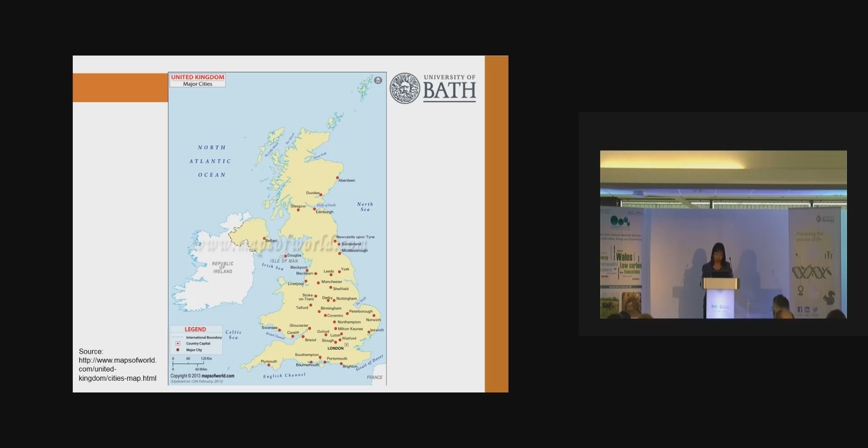Looking at what happened in the past, particularly after the Great Flood of 1953, just 60 years on we had the 2013-2014 winter storms. So we have to ask ourselves, are our coasts safe? What else should we do?

This year I had a very good undergraduate dissertation student, so we discussed why not do some comparison, particularly looking at the 1953 Great Flood and also 2013-2014, so we can assess the performance of the British coastline, and also explore its future challenges.

Our study has revealed that British coasts are currently in a much safer state compared with six decades ago. So what's the evidence? I can show you some numbers and figures.

We looked at the number of deaths from both the Great Flood of 1953 and the December 2013 storm. We also looked at residential properties flooded, the area of agricultural land inundated, and the people evacuated.

If you look at the numbers, you can see we really have increased performance from our defenses. Certainly all these initiatives, efforts, and investment driven by the government are resulting in us being in a much better position.

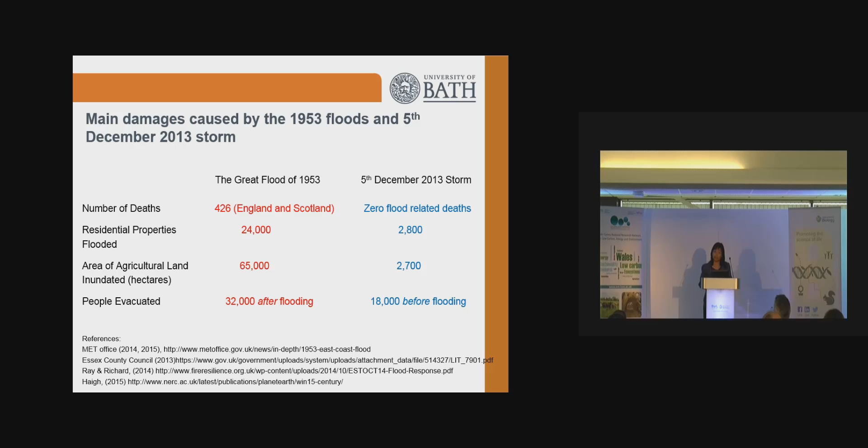But certainly, have we done enough? Ruth has shown some of the damage from the recent flooding event in 2013, the winter storm, and we lost part of the sea defense in Dawlish, and certainly the rail track was suspended, stopping transport for almost two months. So you can see the loss, damage, and disruption to the Southwest economy is huge.

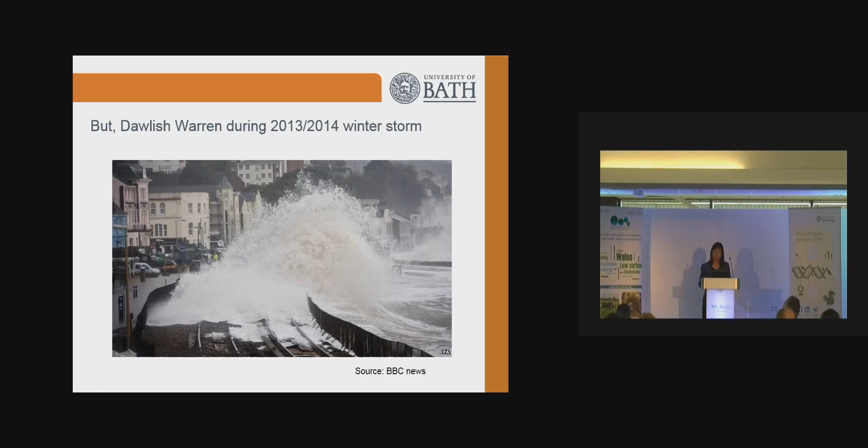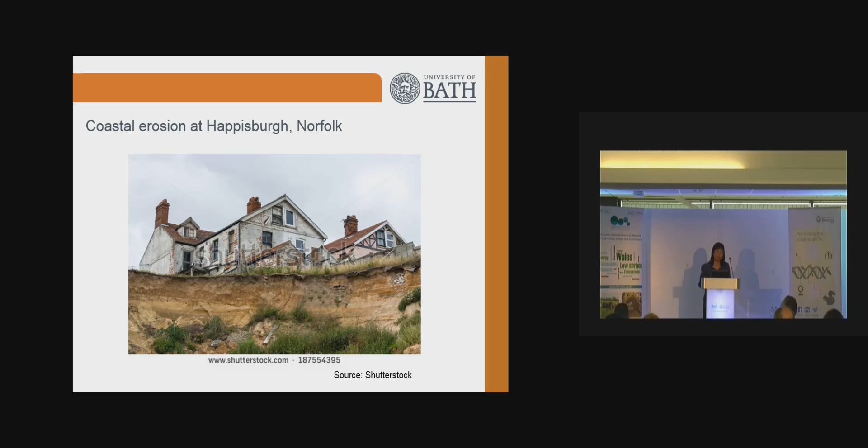Apart from Dawlish, on the other side of the UK coast, particularly the east coast, there's coastal erosion, particularly cliff erosion, another type of damaging coastal erosion. Another problem is if you look at future climate change, we are going to be in the worst-case scenario, with more extreme weather conditions coming.

So that's about the challenges to coastal communities. On the other hand, the opportunities we have come from easy access to the sea. We've been leading offshore wind in the last couple of years, but the whole offshore renewable energy development, including wave energy and tidal energy, represents huge potential and a great market, particularly for the UK to maintain its leadership.

We had talented people working in the oil and gas industry in the past 20-30 years, particularly for North Sea oil and gas exploration. We've got those talented people, we've got the technology, we've got the infrastructure. Now we just need the mission and the passion, the investment, and the support from the government to drive through and accelerate marine renewable energy development.

In the Southwest, we are in a slightly good position. I know Welsh colleagues have done a great job pushing tidal energy and wave energy development, and certainly in the Southwest UK we have expertise, facilities, and capabilities. We've got world-class research universities - Plymouth University, Bristol, Bath, Southampton, and University of Exeter. Together as units, we created the PRIMaRE partnership.

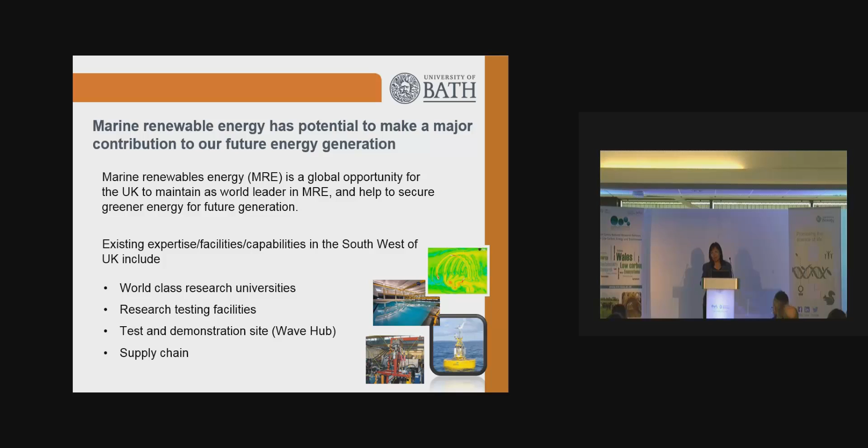So we've got research testing facilities. We've got the Plymouth laboratory, a fantastic facility there. We've got Wave Hub, which is similar to the EMEC. We've got this demonstration zone which can help commissioning and its commercial development as well. And we've got the industry supply chain available to help us work together.

So in response to the need and the recent developments in marine energy, that offers a great opportunity for us to work together. That's why we got a few universities, research units and industry to set up and try to foster research exchange and collaborations with wider communities, with Welsh people, with Scotland, and with the international community as well. So our objectives are working together and driving research exchange.

Each year we host an annual PRIMaRE conference, and this is a free event. It's about 1.5 days, followed by an industry-driven workshop. This year the PRIMaRE workshop and conference will be held in Bath, at the University of Bath, and I'll be chairing the conference. This is a free event happening in early July.

So if you want to attend and join our conference, the registration for coming to the conference will probably be open very soon. Send me an email if you want to come. So that's about PRIMaRE, and this highlights the expertise, facilities and capabilities we can offer.

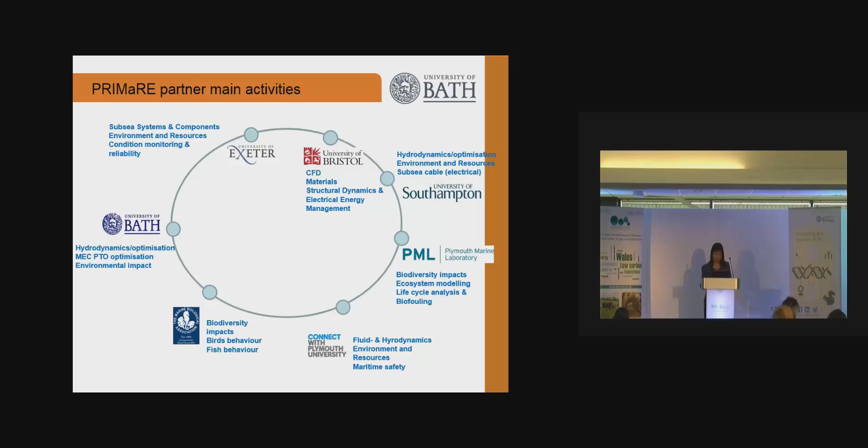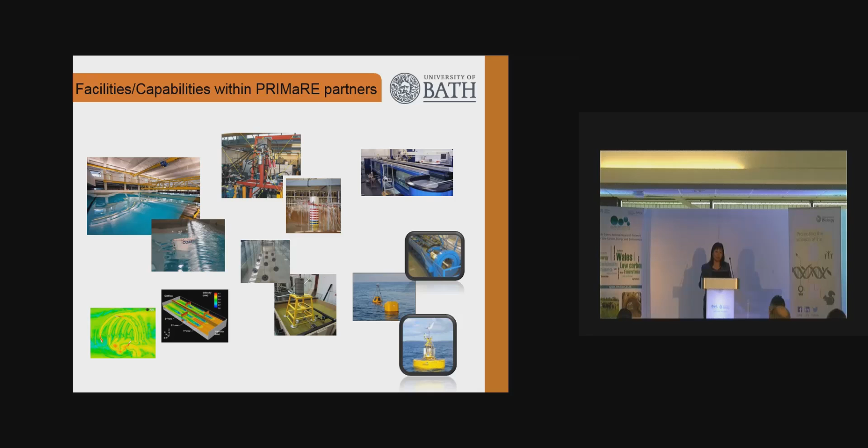So here, just highlighting the research currently being worked on: numerical modeling work for wave energy and tidal energy, and also offshore wind, and the laboratory in Plymouth, and also some field tests at Wave Hub and near Exeter, and for some mooring and facility work as well. So that's about the Southwest Marine Renewable partnership.

In the University of Bath, we recognize the need for promoting wave energy, particularly for the environment and the water, and for the energy shortage, particularly the challenges due to climate change. So we set up this Water Research unit.

That was 2 years ago. We expanded very quickly - at the beginning only myself, but now we have 20 people, with academics, PhD students and postdocs working together. We certainly welcome opportunities to work with wider communities like today's network, and we're going to expand that network with industry as well.

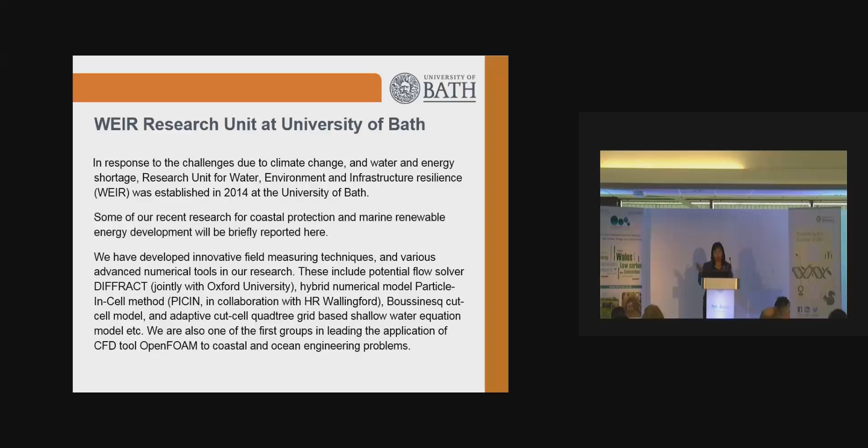So I'm going to highlight a couple of the research projects we've recently been doing in Bath. We have research about water quality, and also flood prediction, for urban flooding, for coastal flooding, and also infrastructure resilience, with different academics covering different areas. Today our focus is on coastal protection and marine energy development.

This research is led by my colleague Dr. Chris Blenkinsopp. He is leading an international effort to do field monitoring about wave and beach shoreline changes, which could help us understand more about coastal processes and how we can promote longer-term sustainable beach and coastal protection.

This research is led by me, and we try to understand - particularly since doing field work and laboratory experiments is very, very expensive - we need to develop excellent, accurate and efficient numerical models to be able to do things very quickly, so within a few minutes or a few hours we can at least get a very quick solution.

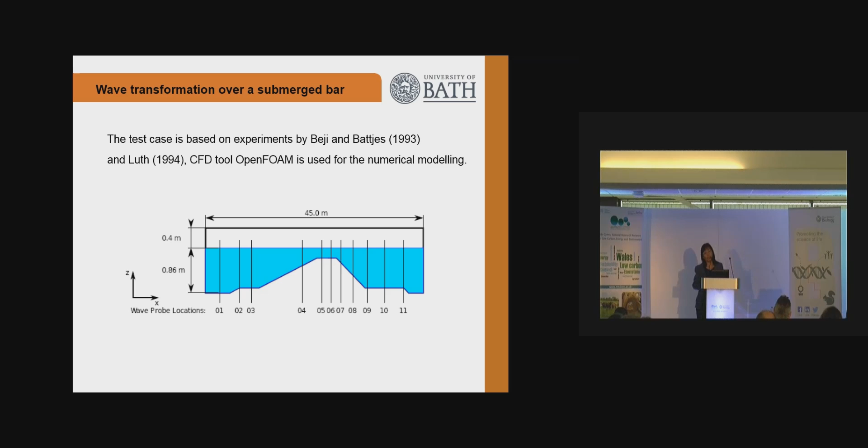So we look at the wave propagation and transformation over a submerged breakwater, to check how that submerged breakwater can help mitigate the wave impact.

What we found, if you see the wave from left to right, we start with a regular, very simple waveform, but once it propagates over the top of the bar and also the lee side, you can see the waveform has been transformed considerably, from very linear to very strongly nonlinear, and also the wave height has increased more than double.

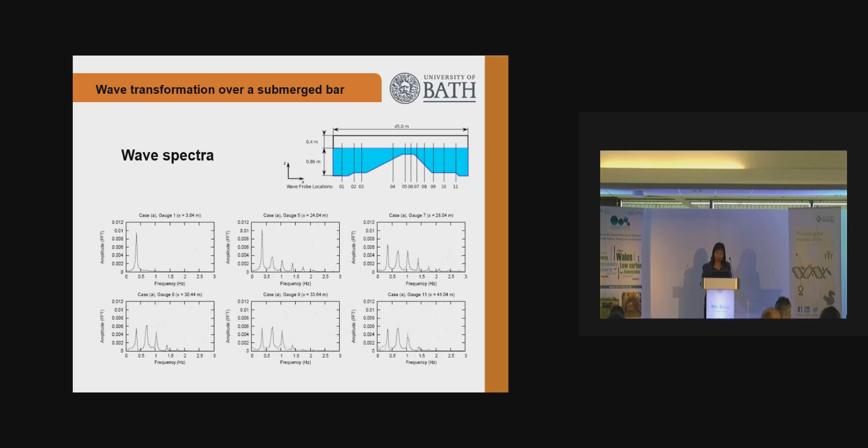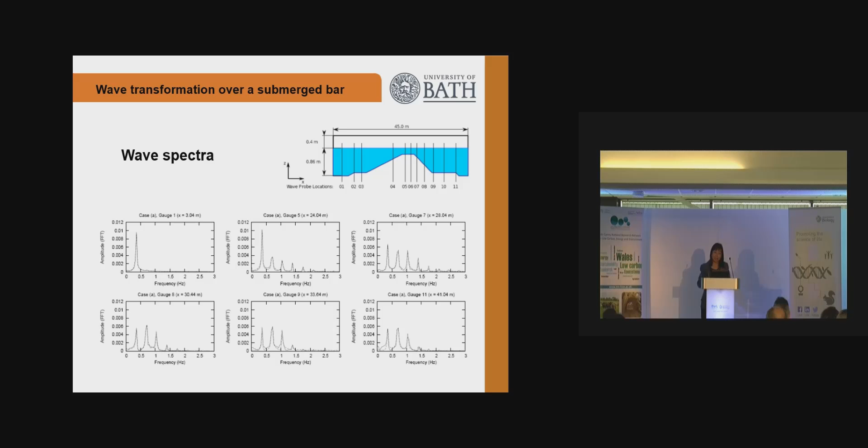Another thing is if we look at the spectra, particularly the energy spectra, so a single regular wave with single frequency, but once it's propagated over the breakwater, you can see how many more harmonics have been generated. We have witnessed up to 8 order harmonics, meaning wave energy has really changed, so we have to look at the impact on the structure as well.

Another test case we've been working on is in collaboration with Plymouth University and other universities in the UK. We look at breaking wave impact on a vertical wall. This is a very complicated problem with bubbles, air, and a very complicated free surface. So we've done both laboratory study and numerical study to try to understand what will be the high peak pressure and loading onto the vertical seawall.

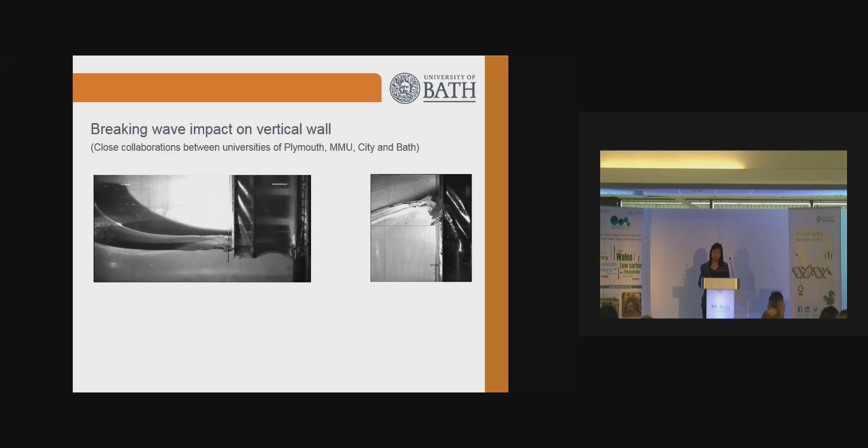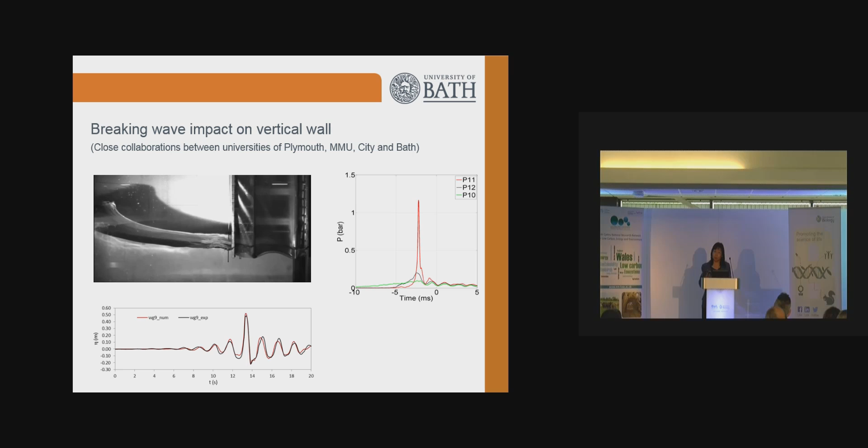So that could help for the future design of infrastructure. You can see that once we get the breaking wave impact on the seawall, we get a really short but very massive peak in the pressure. So for part of the structure, you have to design it to resist this violent, impulsive pressure. We've also done numerical modeling work that confirmed we can reproduce the same quality of result just using our computer in the office.

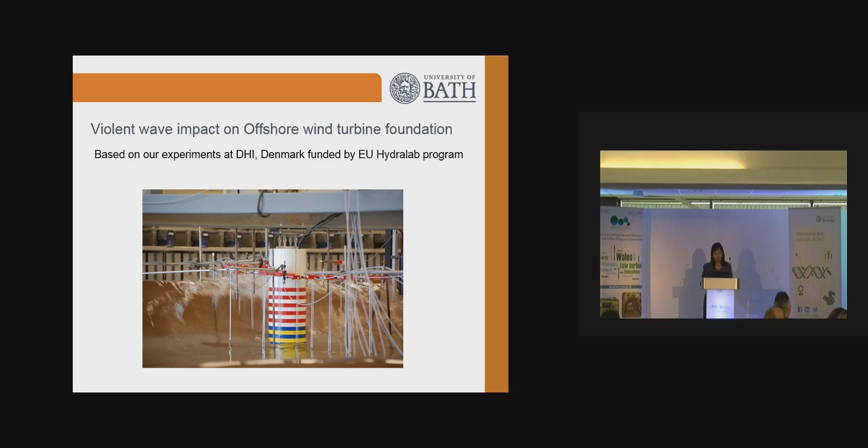Another work we've been doing was a large scale experiment performed in Denmark, funded by European funding. I was the project leader, leading a couple of universities from different countries. What I found from the breaking wave impact on this offshore wind turbine foundation is that the loading we have been designing for in industry is not enough, because the design code normally uses linear wave theory.

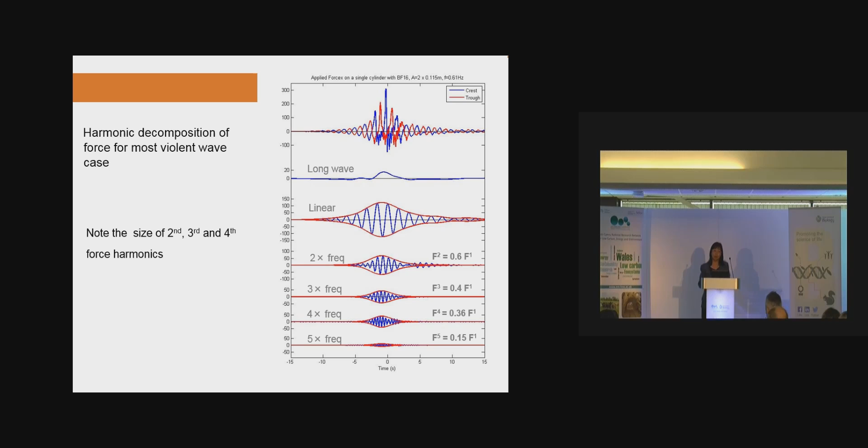If you look at the second order, that's almost 60% of the linear wave loading, and the third order means your linear wave loading is only about 40%. I hope this message can be delivered to industry people, how we can change the design code to take account of this higher order, particularly resonance for the structure and fatigue as well.

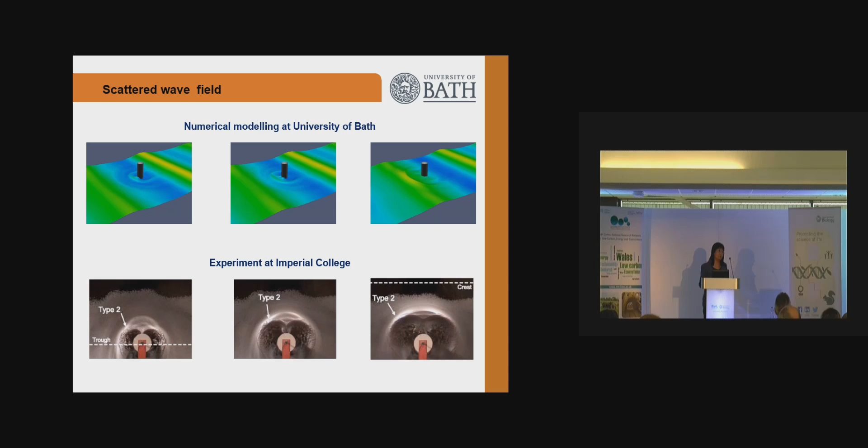We also compared with other research from Imperial College, and the numerical model and experiment all confirmed the results are the same, consistent in their answer.

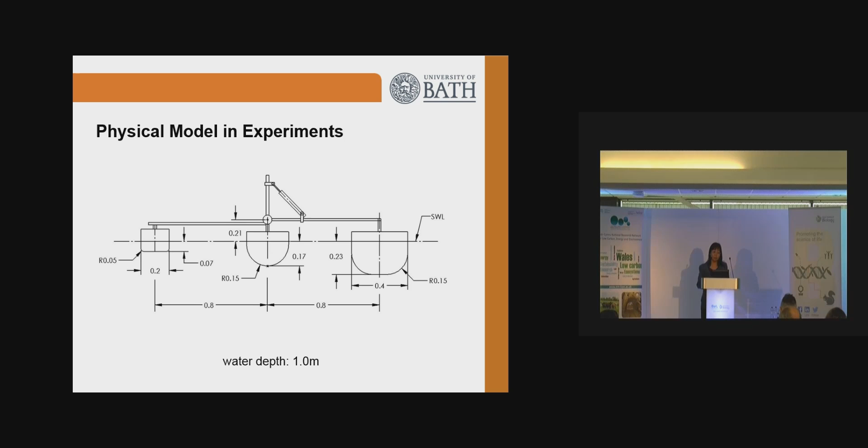Another thing we've looked at is floating structures, particularly wave energy devices. This is a collaboration with Manchester and Oxford as well. We try to look at how we can improve and optimize performance, and also look at wave energy devices in arrays, how we can enhance the performance.

The interesting thing is, if you put these devices in an array with only 2 meters spacing, we are not losing out on energy. Actually we can maximize the energy output, which depends on the layout, wave direction, and also the optimization of power take-off and the design of the structure.

So that's the figure we can show. Probably I don't know whether you can see it, sorry, I did something wrong.

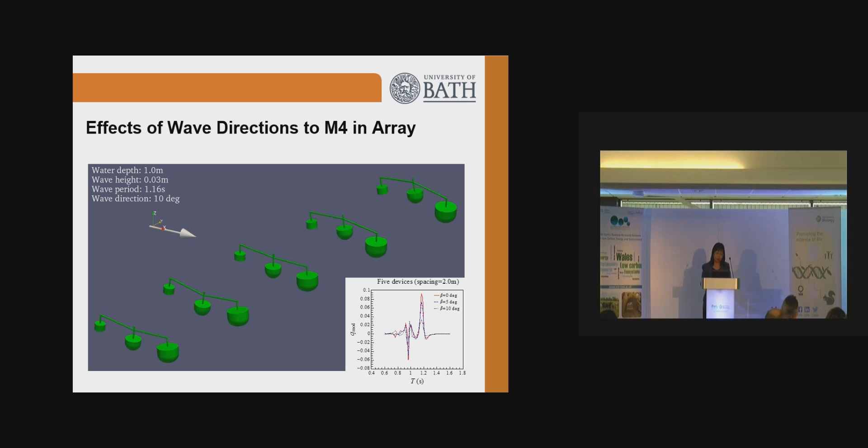So I think that's probably the main topic, and the main message I want to deliver is we are a coastal country. We have challenges from climate change, but we also have the opportunity for getting more green energy. But we need to work together. Certainly Southwest, Wales, and Scotland, we all need to work together. Thank you very much.